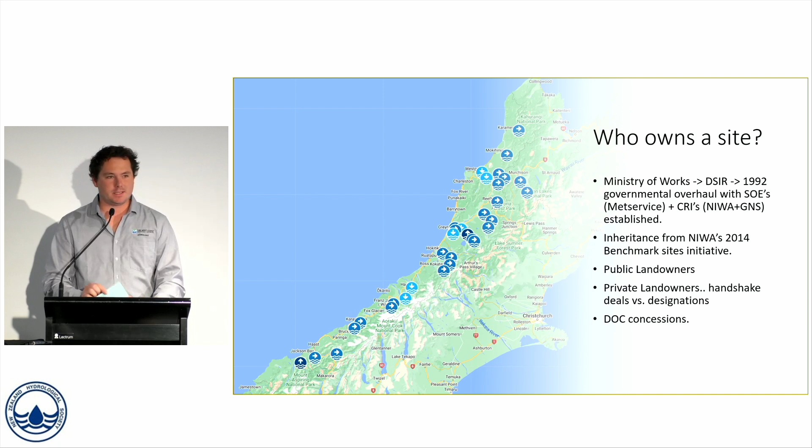I was an electrician before this, and the health and safety of that industry and this one is apples and oranges. It just didn't compare. I couldn't think of a dangerous thing that we do at all until I was doing a staff gauge reading, and a coworker was trying to come down from above me and kicked a cobblestone just smaller than my head, and it splashed into the water next to me, and I was like, that could have hurt.

So if you want managerial approval, one of the good things to do is take your boss out in his first couple of days and get him wet. They love that.

We have Grey River at Dobson. This is the closest site to Greymouth, the one that all the flood warning sort of comes into. And this is our blueprint of how we wanted to upgrade other sites. Because just getting down from the road to the river, most of our data collection relies on that simple ability, and we need to have those physical structures in place to do that safely.

Because it turns out, for most of us field workers, riverside is as much your workplace as your office is in terms of the Health and Safety at Work Act of 2015. That's just as deserving of investment as your risk in the office.

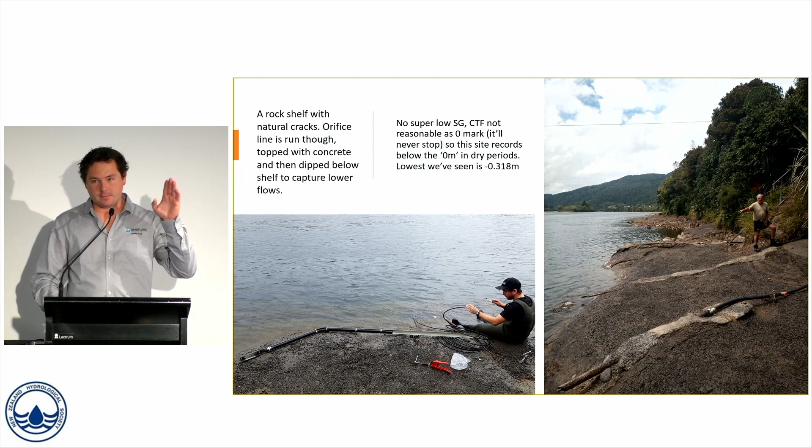So we want some steps. NIWA built these steps, and then it got finished off by a licensed builder. We've got this rocky sort of shelf where the orifice lines go down, and then we've kinked the pipe so it goes down a little bit further.

One of the things I want to get across today is that every site has different geology, different topography, different physical and constructural methods of trying to make something stay.

For example, this site has a stilling well, or used to. We can upgrade encoders into radars, but if the river moves away 20 meters, that stilling well's high and dry. We've got several stilling wells around the West Coast that are capped off and just not able to be used anymore. Vice versa, if the river comes 20 meters towards you, goodbye stilling well. These structures that we put in to be stationary and to get us stationarity, they don't always last.

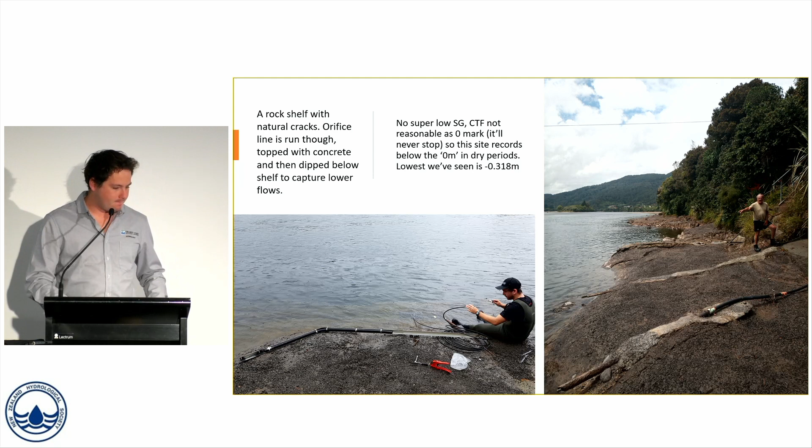So we still have 2 stilling wells for now. Next slide, please. Thank you.

Yeah, so this has a little platform that you get down to. It's just fabricated metal, and handrails is all pre-purchasable. You just use Allen keys, lock them together, a little bit of Meccano.

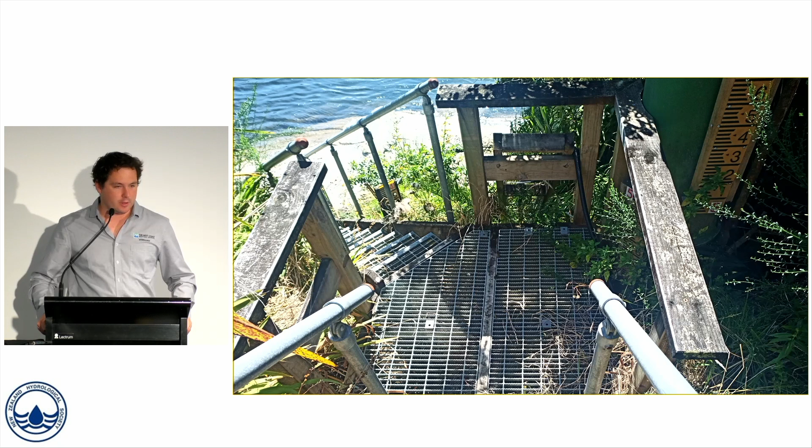But this is what we sort of took as the design philosophy. This was the site that we thought had it sorted out, had it figured out.

This was the site that the rock nearly hit me at, so this was the first challenge. We've got a bunch of spurs along the edge there that were just thrown off the back of a dump truck by the farmer. This was not strategically placed, as they say. And on the tip of one of those spurs, this is not working.

So that's our site access. That's where some of you saw the kayak that we had yesterday. We got to put our gear in the kayak and cart it down here and then set it up in the river. This has got about a 4-meter verticality to it.

And as you see, it's sort of crumbling, it's falling away. So before I started, they went and put this little concrete plinth on the side, just some corrugated iron as a sluice to shoot your concrete down from the top. They had a lot of fun doing it, I'm sure.

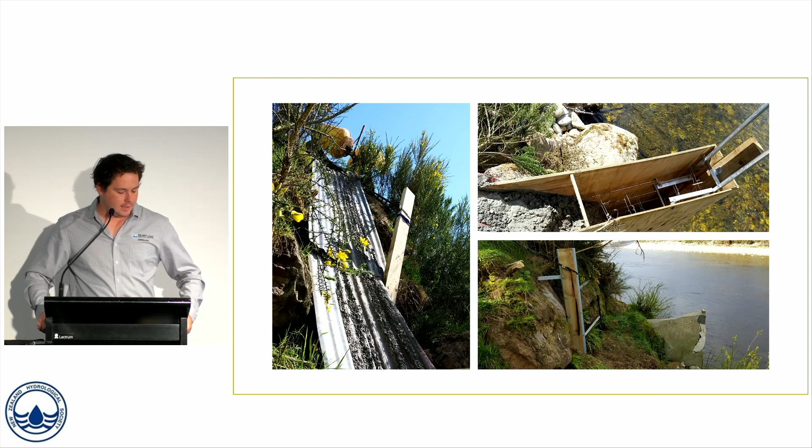And that little concrete wart on the nose of this spur, it was not long for this world, shall we say. Again, everything's crumbling around it. So the decision had to be made: do we keep the site, or do we try and find somewhere else?

We tried to find somewhere else. There's not much around. And also, this is the only site on our whole network that has low flow consents on it, so maintaining gauging here was fairly important for us. So looks like we got to upgrade, which is cool.

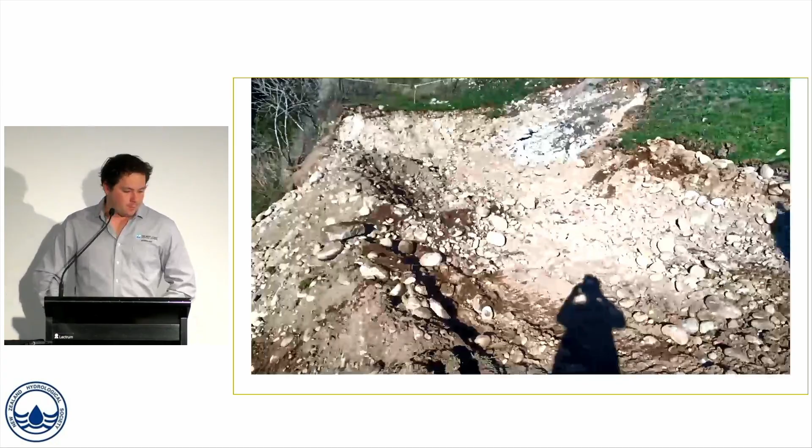So I talked to a few people, and we got 150 tons of rock thrown in there, and that's it. Turns out 150 tons of rock is not much. Who knew?

We'll talk about that. So that still was too steep. We ended up having to get the digger back in and choose where to relocate.

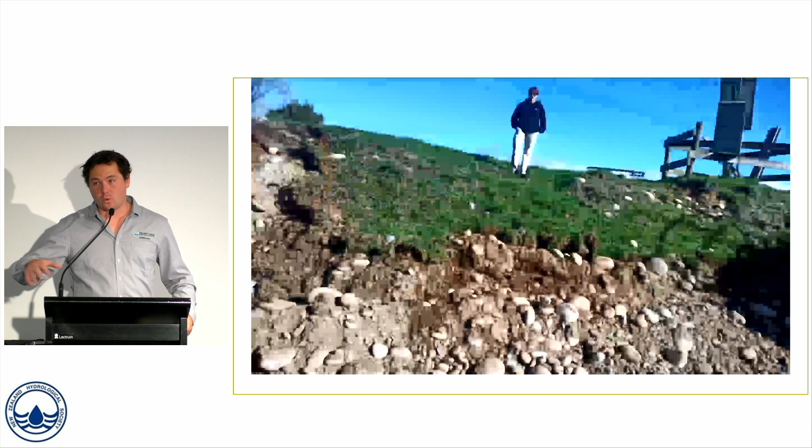Water quality also had a say in this because they had instruments on the side of that concrete plinth too. So I was thinking, oh, well, we could just launch our boats in this little shallow pool here and maybe have our staff gauge and our instruments going into this little pool. But...

Turns out that spurs are kind of designed to self-heal. Once they settle in, every fresh that comes through will take out smaller bits of sediment or deposit more. And even if you put a staff gauge on a really big rock, it's no guarantee that staff gauge is going to stay stable - it's probably going to move a bit. So that idea went down the drain. Oh well.

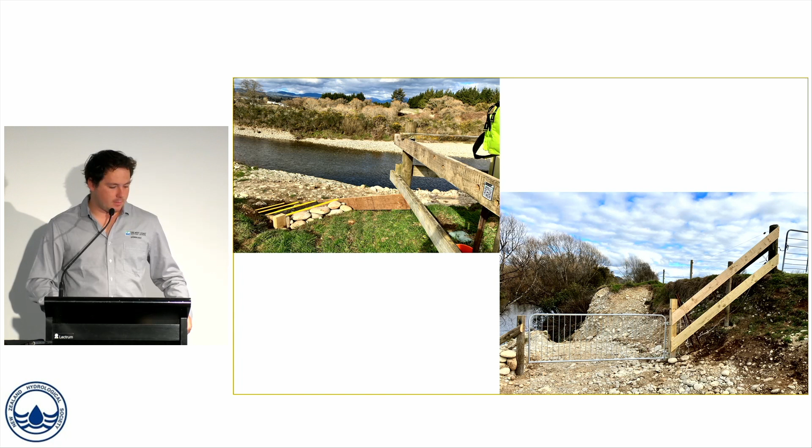So this is what we did. We got a digger in. We put some stuff to stop cows getting too close, and did a bunch of upgrades. Basically, we got concrete in. We spent about 2 weeks, I think it was, to sort this out.

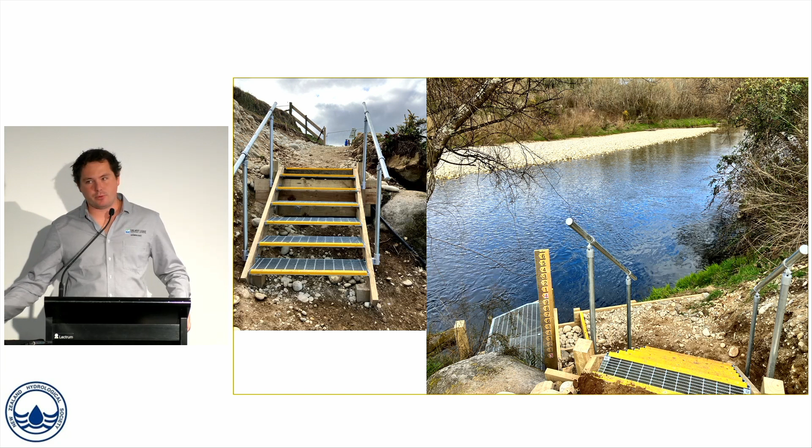We used the rain gauge fence as a temporary benchmark because all the previous benchmarks got wiped out by the digger rumbling through. And yeah, this little platform at the bottom here is detached from the rest of that staircase you saw, so that if it gets wiped out by what John Ellis calls a blunt object trauma device - a big tree - it will hopefully leave a lot of structure intact so we'll still be able to go and put something back in future.

Same reason for that corner being cut off, bit of an angle there. So this is most of the way, but still getting our Q-boat or our kayak or whatever we might be using in at that spot - not too easy. So maybe still a little bit more to go.

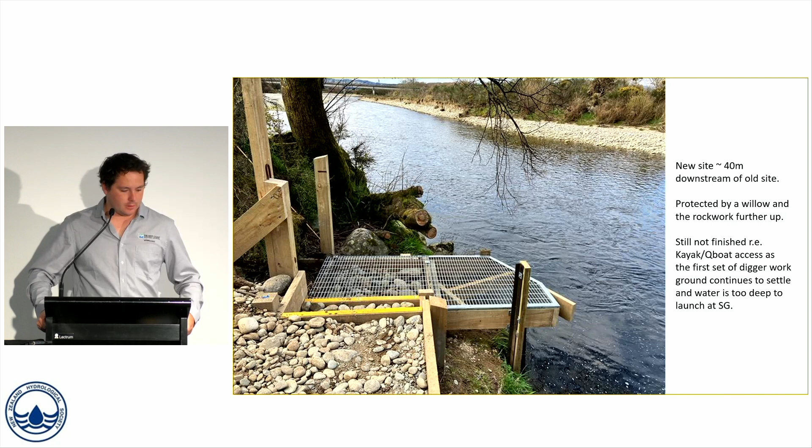And after a bit of high waters, it gets fully covered in debris, so I've got to sweep that all off too. Just for fun. So, that was Mawherete. We had a lot of learnings from that one.

Because it turns out that first idea wasn't appropriate. We needed different advice and different managers to say yes, do it. We also then took management and HR to site to show them that hey, this is what we can do instead of trying to get other contractors in - if you allow us to do so, this is what we can achieve. And they said, yeah, that looks great, we trust that. And having that trust, it goes a long way.

We tried to put some hobos in, some piezos, to stitch on to the data record to try and reduce the gap. But experience shone through again, and it turns out if you have too many things being recorded, it clogs up the memory pretty quick. So the piezo ran out of memory 2 weeks before we actually finished getting a bubbler in once again.

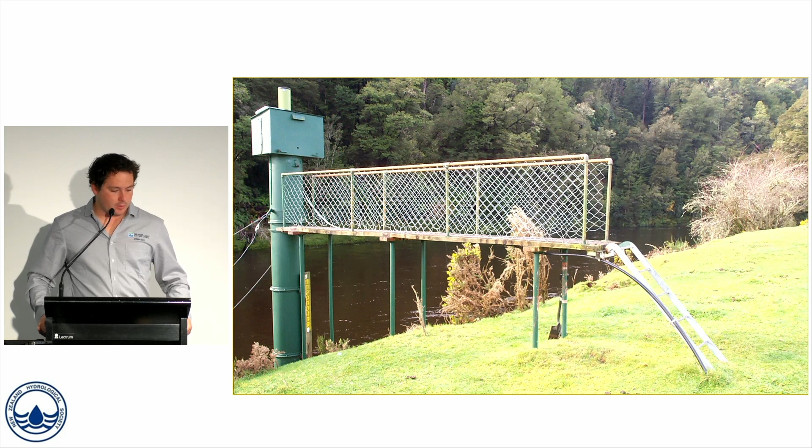Once again, we have a lot of problems here. So this was the catwalk when I first started in 2020, and it's a good thing it got upgraded. It cost about $30,000 to upgrade it to this - you can see it got a little bit more robust.

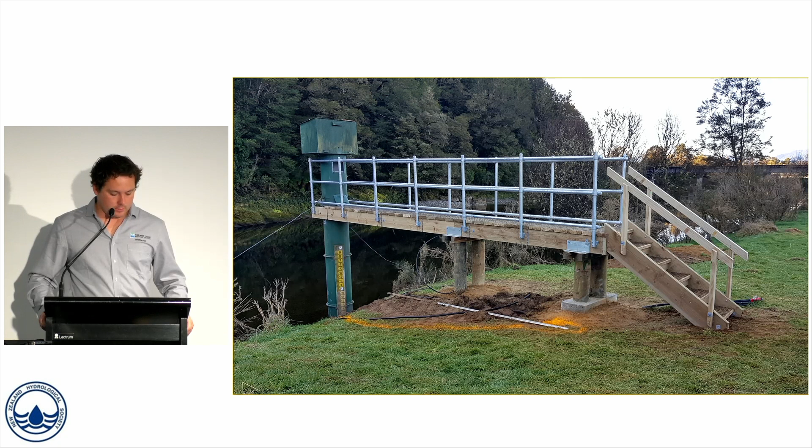Thank you to a civilian flood hunter for this photo. That is that catwalk and that Stilling Well Tower. Cool, huh?

Our recording device, our logger and everything, is in a box on a pole - you can sort of see that to the right. So everything else is dug in underground to it.

So it's quite deep, about 1.5 meters. It's hard - can you guys just go through like one slide every 8 seconds from now?

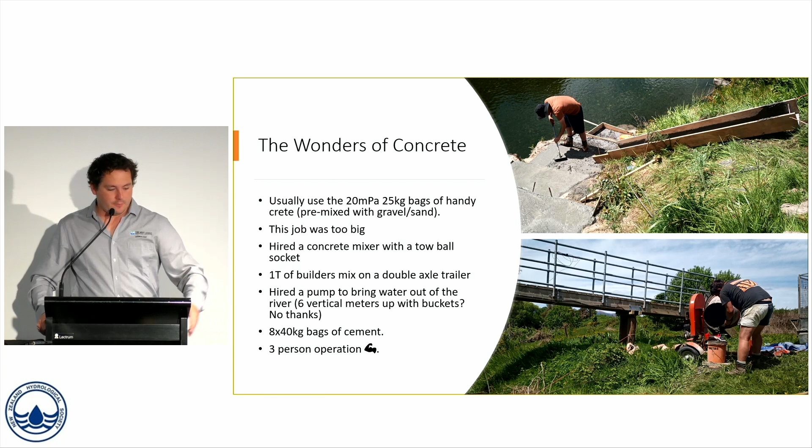Okay, so we went and did some work. Mixed a batch, used this little flume that we built on the day to just pour it down the bank, and Chef Ruben was cooking up a batch up the top. Drilled in, put rebar to keep the steps where they are, into that rocky face that you'd seen before.

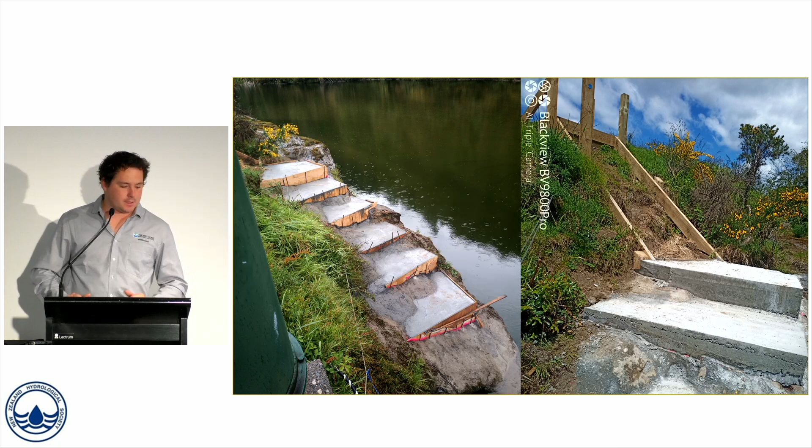At the top, we're going to put more of those metal steps in - really, really simple, you just bolt them from the sides of those wooden runners. Really nice. So handrails, we've got yellow, like grippy fiberglass anti-slip things there. But this again is only really like phase 1, maybe phase 2 finished.

We still have to get the interface of the actual water sorted out, how we lower stuff down without ropes or falling in. So the next site, Buller River at Woolfs.

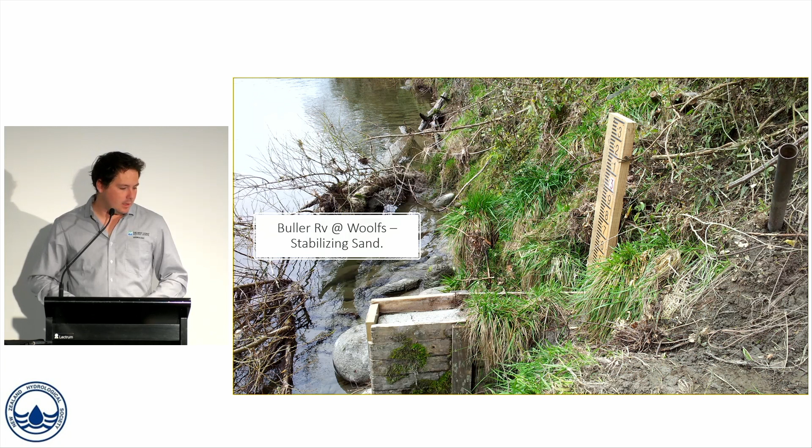This is trying to stabilize sand and probably 50 years ago someone's rubbish dump. It's like the second oldest site on our network - I think it was back in the 70s, as far as I can tell.

When you've got concrete that's there and everything around it starts to get eaten out and eroded away, your staff gauge slumps. It falls away, it's not reliable, it's no good. So you've got to come up with something.

These are just pictures of that - you can see it getting undercut there. This is again also about a 5.5 meter vertical from up where we can access. There's the old stilling well tower you can see there, down to the water level. So it's a really, really steep site.

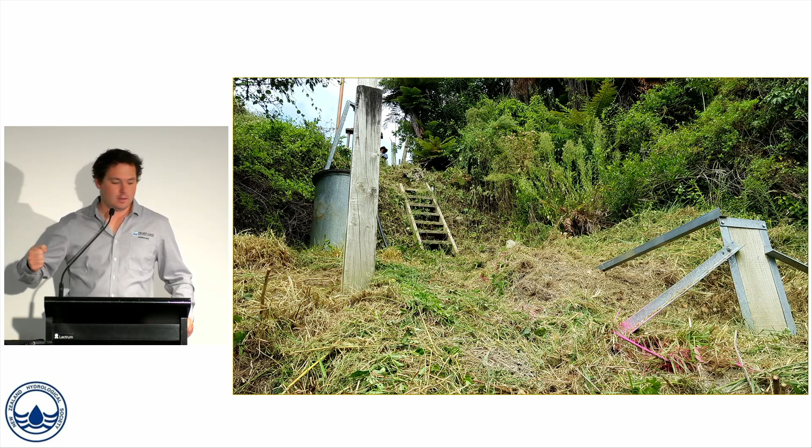This is what it looked like after someone put some wooden steps in there. We wanted to do better and needed to, because if we have to survey in our instrument every time, that gets annoying real quick, especially when you forget stuff.

Can we just go back once? Can we go back once?

Stop there please. So I contacted an engineer, and he contacted a construction company, and they came up with this idea, which is getting 9 concrete blocks helicoptered in, placed on site with catwalks in between and ladders to make it all happen. It was about $60,000 to say yes to that work.

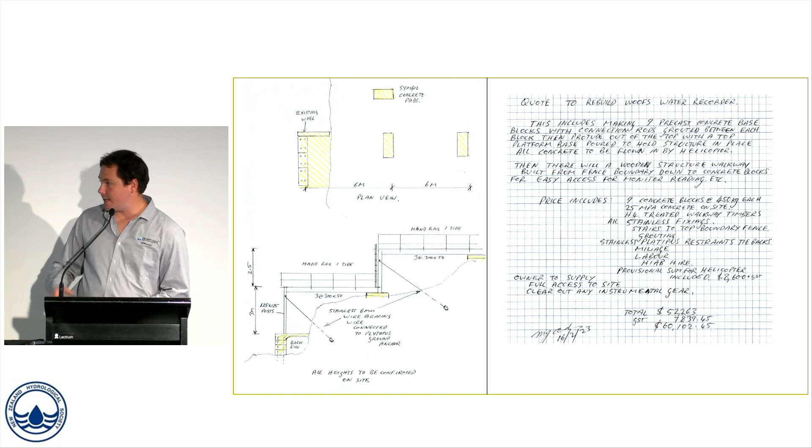Can I get a show of hands, just from anyone - would anyone pay 60 grand for access to their site? One. Hey, one. Okay, works for him.

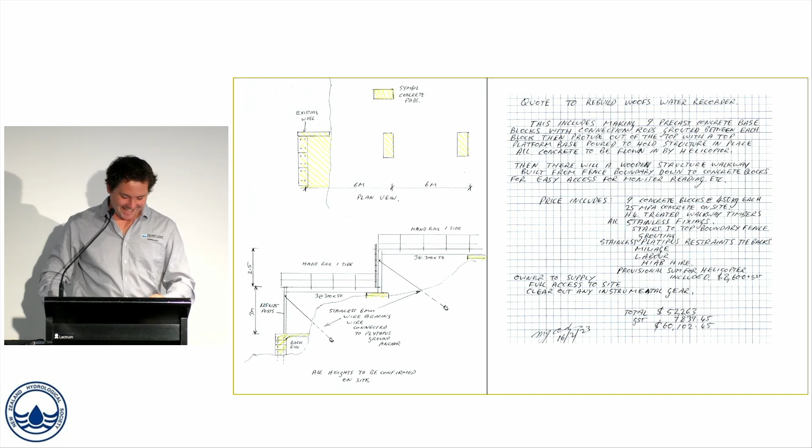And Platipus ground anchors to get everything in. That's fine. We, by this point, had that trust from management to go ahead and do better.

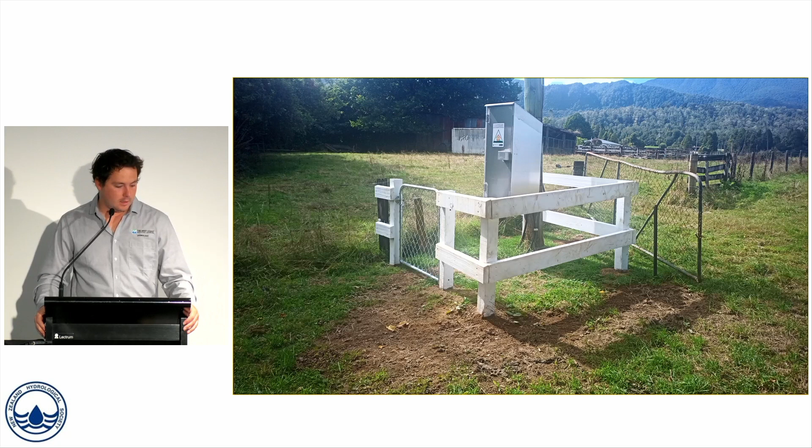So this was a shitty electric fence until we put real things in, but cattle and sheep are in here all the time, and well, we only replaced that box like a month ago - it had a giant dent for the last 4 years.

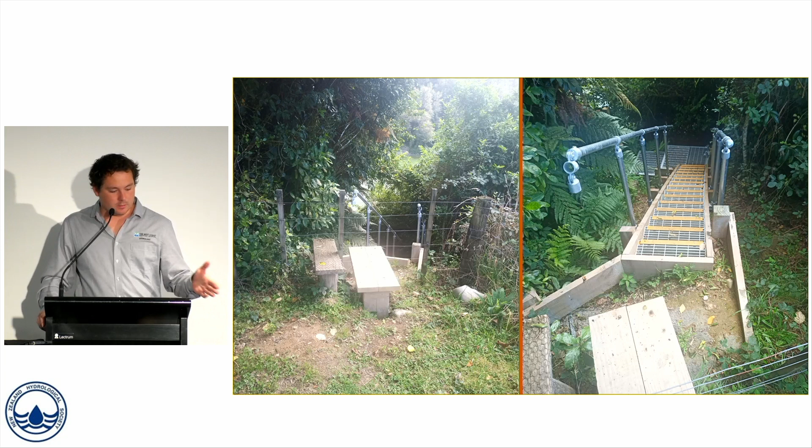This is what we've got now - we've got a new stile. Once again, you'll see these metal steps, handrails locked in.

There's still a bit of a work in progress here, down to a platform, a bit of a landing, and then down again to sort of like a diving board, really. And then there's that ladder from the other site that we've just repurposed and concreted in.

So that is about 100 bags of concrete. At a very, very low flow, we kind of just stacked them and then put them in situ, so when the river came up or whatever, atmospheric moisture would harden it. And that's our current setup of how we're going to try and stabilize or put a block in that's not going to move - or well, we'll see what happens, I guess.

So far, this is about 90% done and has cost us 16 grand. So a little better, I guess.

I just wanted to say as well, so in that Mawheraiti one, the one first mentioned about the cobblestones coming down, that was $15,000 just for the earthworks and the rock, and $10,000 for everything that we'd done after that with the construction materials. I don't know about labour - don't ask me about labour. That's another thing.